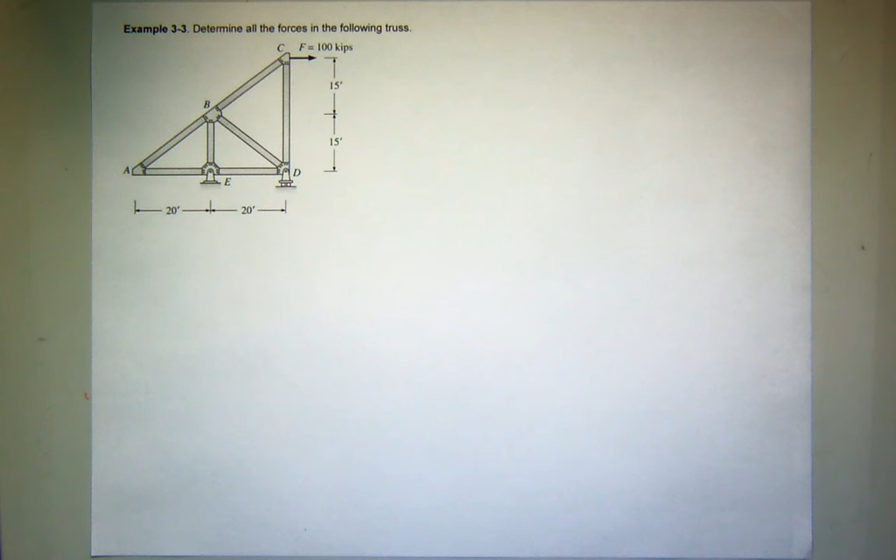All right, so let's look at this problem. We've talked about it a little bit already, but the first thing in terms of strategy, we probably are going to want to find the reactions at D and E to give us some things to work with. And also we're going to look for zero force members. So doing that first.

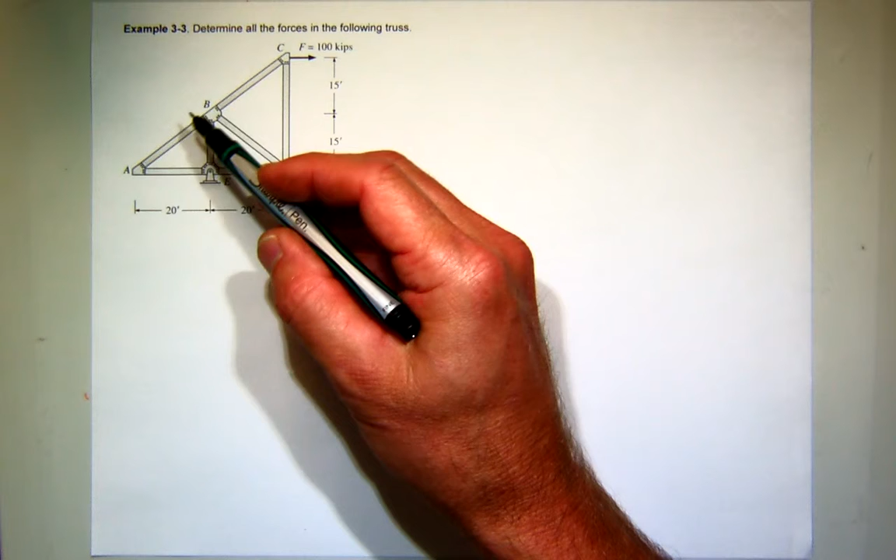The case 1 condition we talked about for zero force members, I see one here at joint A. Since we have 2 members connected and no external load, that means that this element and this element are 0. There are no other case 1s.

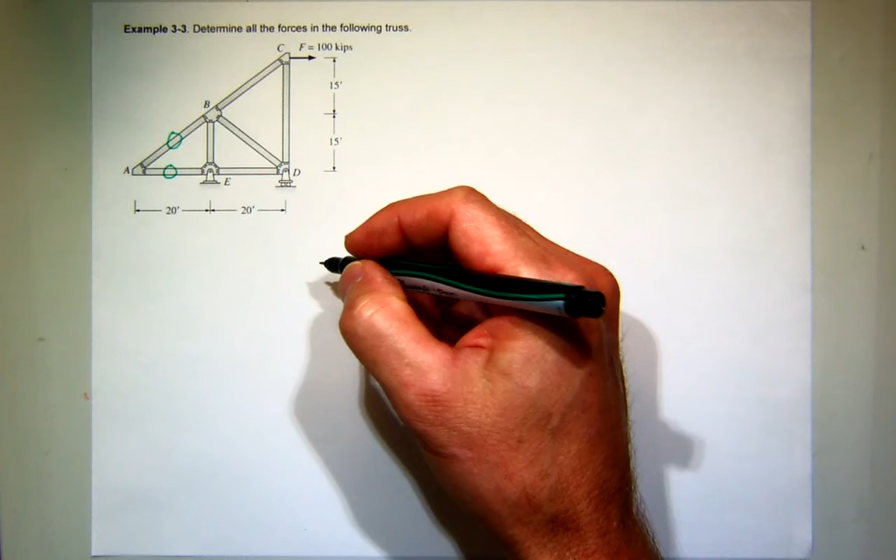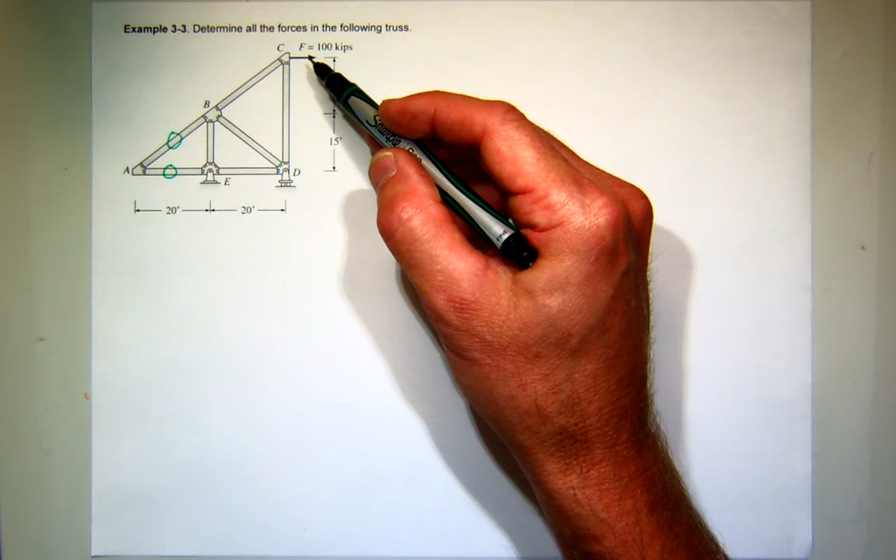It looks like you might create a case 1 here, now that this one's gone, but there's an external load at E, and similarly there's an external load at C. And then there's no case 2s, no 3 members connected, 2 collinear. So we got 2 pretty quickly. That's nice. Let's go ahead and finish the problem.

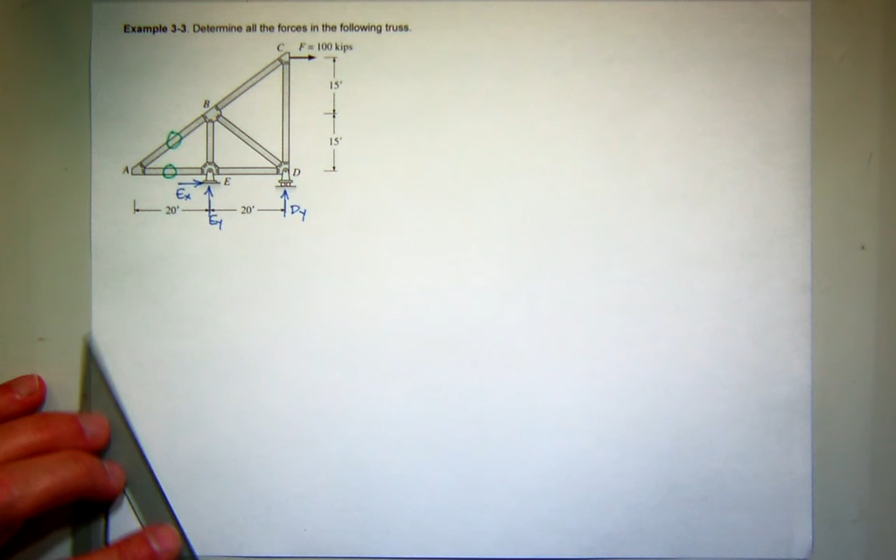I'll have EY and EX at my pin, and DY at the roller. So let's find those reactions.

I'll start by summing moments at the pin, E, equals 0. So what kind of moment does D create about E? Positive. So I've got DY, and what's its moment arm? 20 feet. And then the load up here, which happens to be the only load on this problem, 100 kips, creates what kind of moment about E? Negative. So I have 100 kips, and its moment arm is 30 feet.

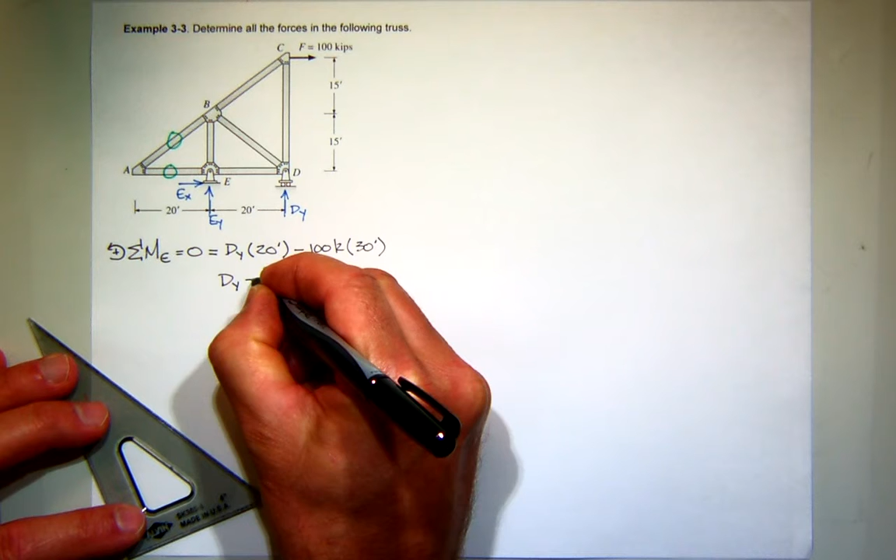So it looks like DY is something weird. 3,000 divided by 20, which is 300 divided by 2. 300 divided by 2? 150. And that'll be kips. And it's positive.

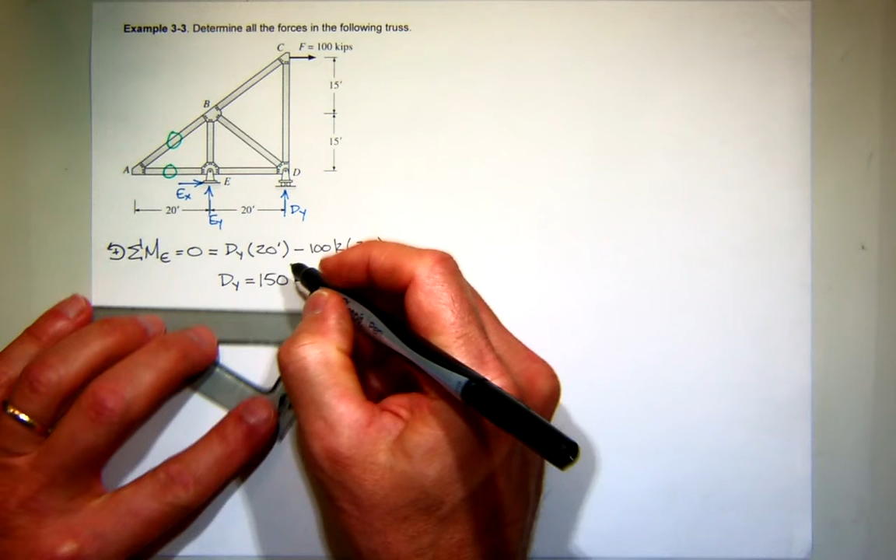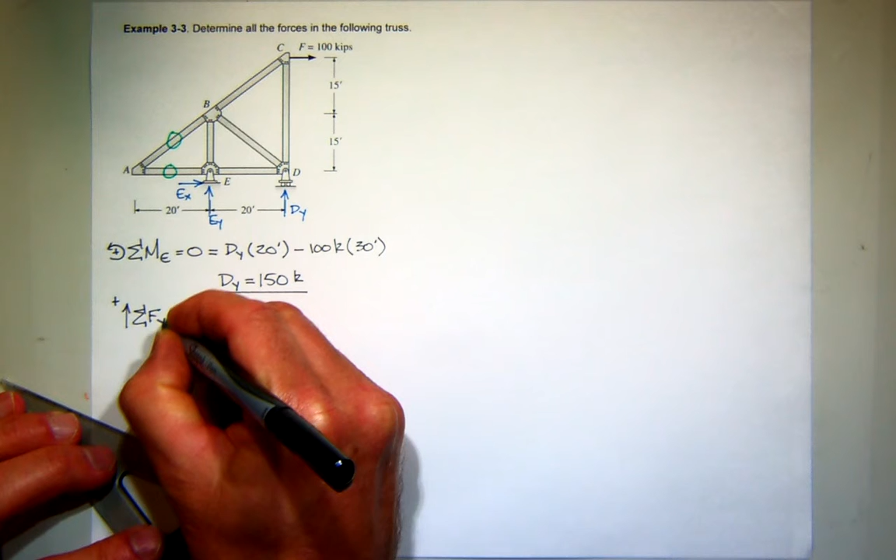So now we can sum forces in the y direction. So I've got EY up, DY up, nothing else. So that means that EY should be equal to negative DY, which is negative 150.

That kind of makes sense too. If you sit here at D, kind of think about it, if this force is trying to rotate it clockwise, well then this force better balance it counterclockwise, which in that case would be negative.

And then finally, we'll sum forces in the x direction. As you can see, there's the reaction EX to the right, and then our applied force of 100 kips also to the right. So it looks like EX is opposite, or negative 100, so it's actually pointing to the left. So we have our reactions.

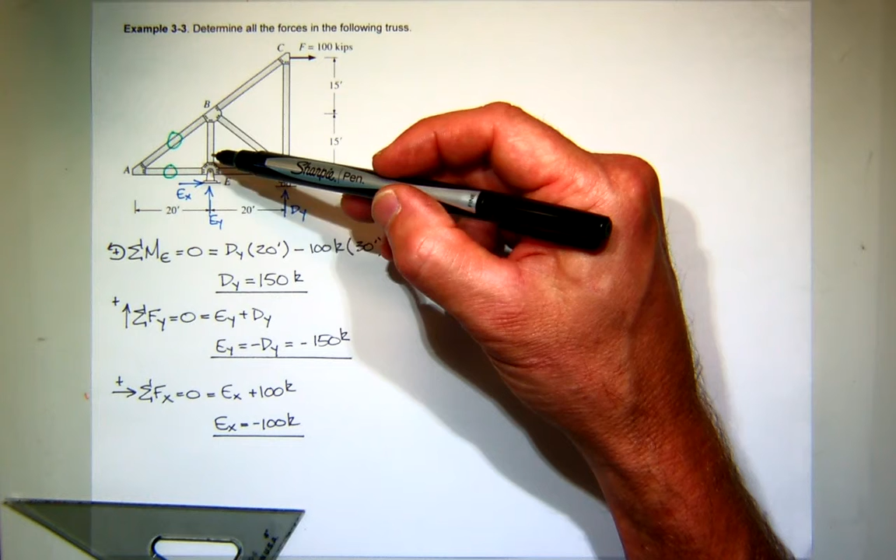So of the remaining joints that we have, B, C, D, and E, where's a good place to start? E would be a good place, just 2 unknowns. And what's good here is that DE is just horizontal, and BE is just vertical. That's a good one. Where else should we go? Probably C would be easy - again, only one has an X component, we should be able to get that pretty good. And then we'll just have to decide which way we want to go with the other 2. But yeah, let's start with joint E, that seems to be the easiest one to do.

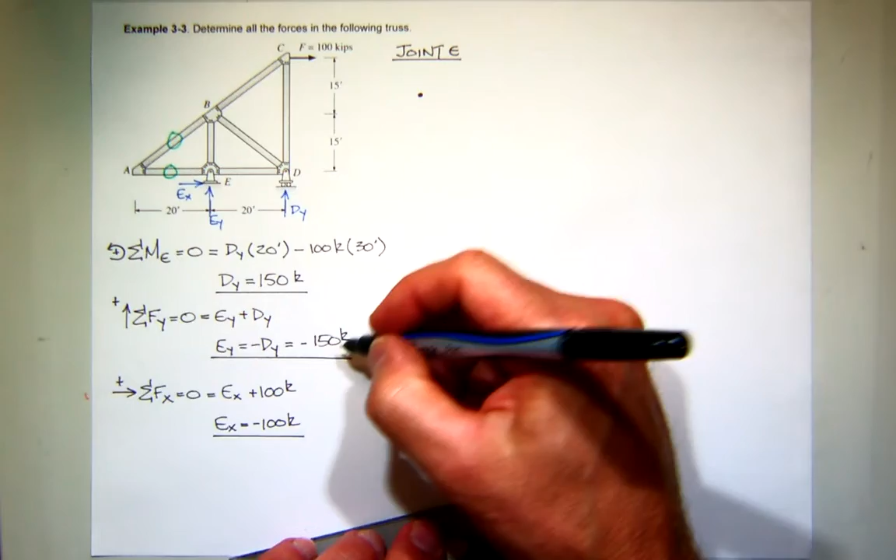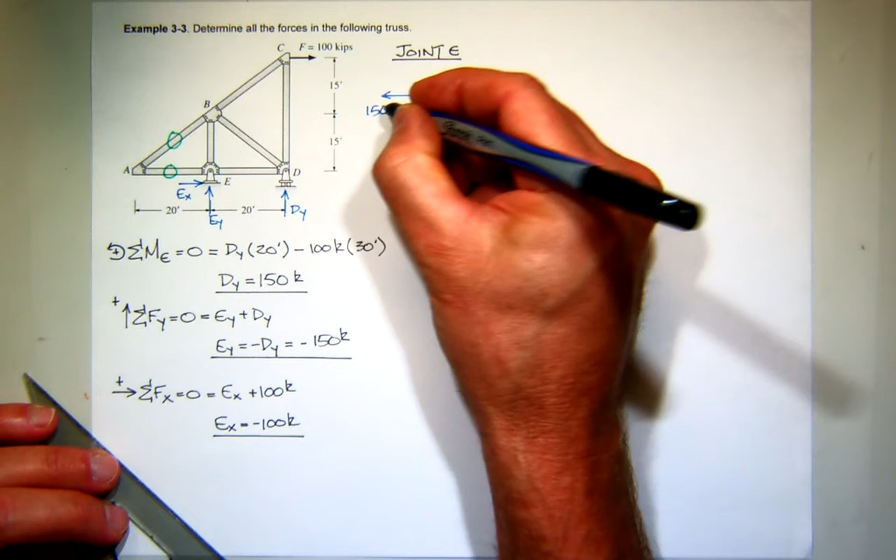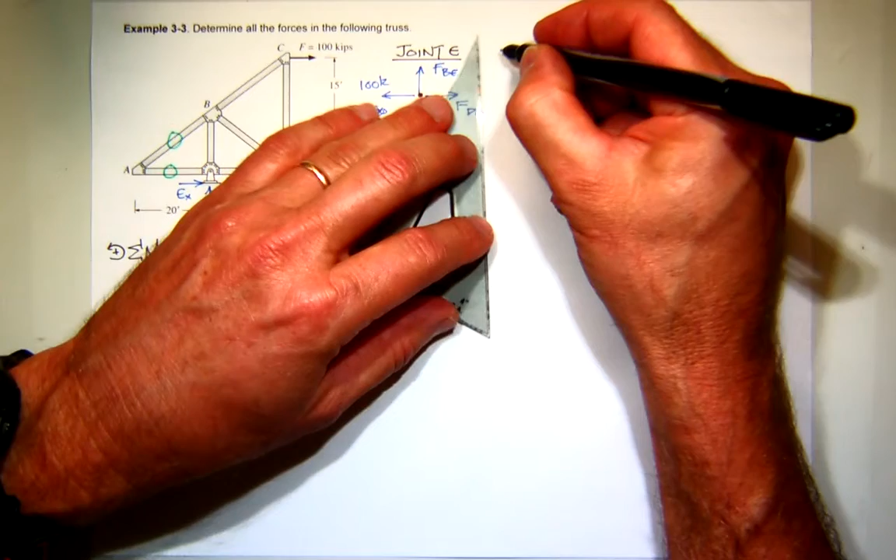So we'll start with joint E. Let's see what forces are on it. So EY we found was down, equal to 150 kips, and EX was to the left, also 100 kips. And then our tension forces are unknown DE, horizontal, and unknown BE, vertical. It's going to take us longer to write it down than it'll be to solve these, but let's do it anyway. No particular order here.

I'll just sum forces in the Y direction first. So I have the force in BE acting up, and then minus 150 acting down. So it looks like the force in BE is 150 kips.

Kips. Yeah, that's my K. I have a new K. It looks like an L and a B, but it's really a K. Oh, I did it here too, didn't I? Well, at least I was following my free body diagram, which was incorrect, but still. Sorry about that.

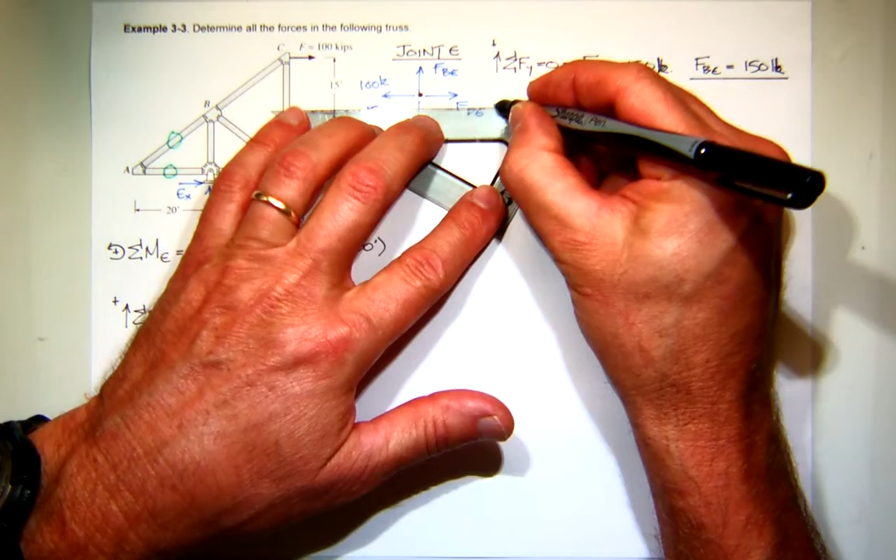So BE is in tension. Now we can sum forces in the X direction. Let's see if I can get my units right this time. I've got the force in DE to the right, and then to the left 100 kips. So the force in DE is 100 kips.

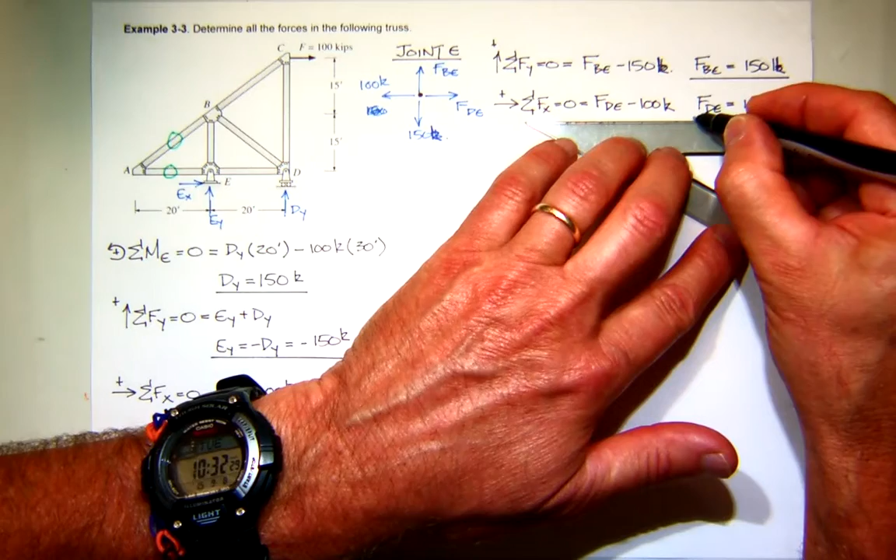So both those forces are tension. I'll go ahead and put a little tick mark through those. I got those two, so I just have 3 left. Now technically I could go to B, C, or D. They all qualify now, because even at B there's only 2 unknowns.

Now that's not a good place to go, because your unknowns BC and BD both have X and Y components. That's 2 equations and 2 unknowns solved simultaneously. Probably not a good spot. At C, only one unknown has an X component. That would work, and also over here at D would work.

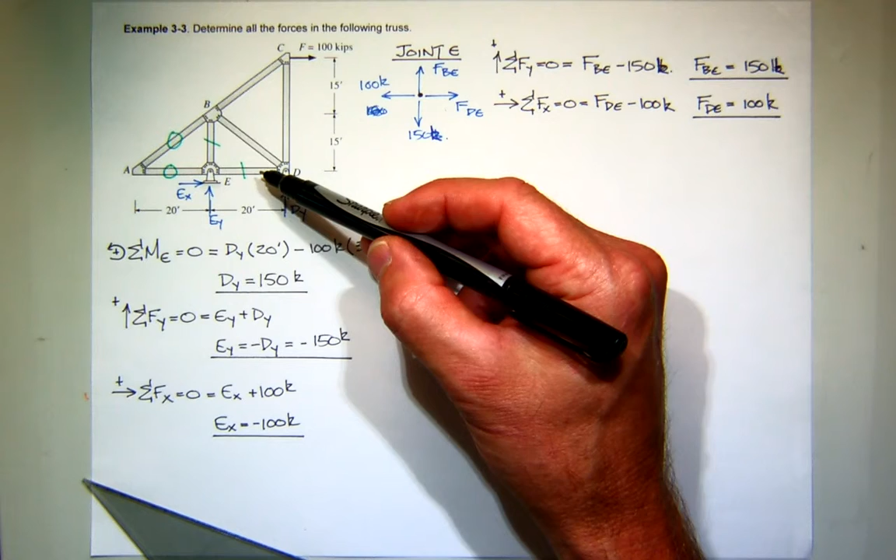Now I'm going to choose C because I can solve these forces at C without including any of the previous calculations, so I get an independent check on that. If I go to D, I'm going to have to include both dy, which I computed, and the force in DE, which I computed. So I think C is a better place to go.

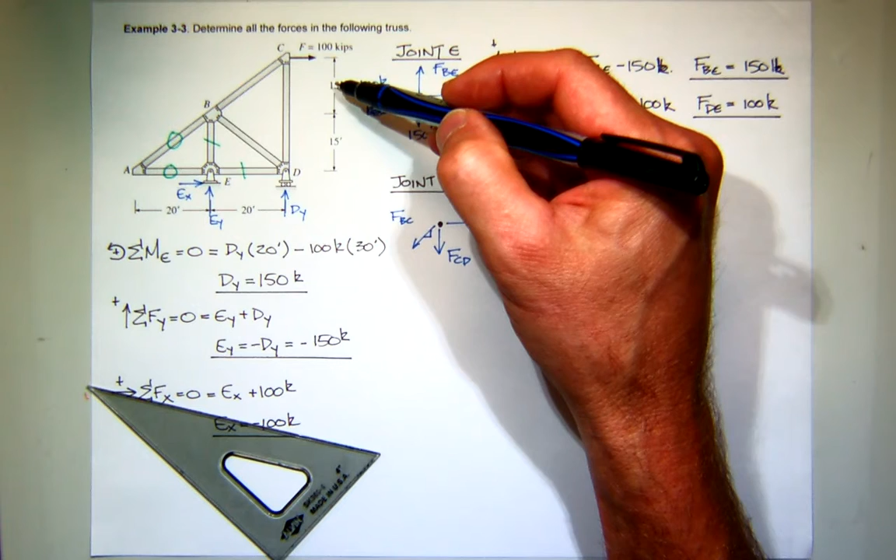So at C I have my 100 kip force, and I'm going to assume tension in CD and tension in BC. I'm also going to look at the orientation of this. It looks like for BC I drop 15 feet and go over 20. If you divide those all by 5, you get a 3, 4, 5 triangle. So it'll be 3 vertical, 4 horizontal, and the hypotenuse would be 5. That's going to help me with my calculations.

Since BC is the only one with an X component, that's where I'll start. I'll assume right is positive. So when I sum forces in the X direction, I have minus 4/5 of BC, that's the horizontal component acting to the left, and then the 100 kip force acting to the right. So it looks like the force in BC is positive 125.

Is that right? 500 divided by 4? Yep. That kind of makes sense. With this setup, as you pull here at C, you'd expect the joint C to move to the right, so more than likely BC would elongate, get tension.

Now that I have that, I can sum forces in the Y direction, and should be able to find CD. So when I do that, I have now the vertical component of BC, that would be 3/5 of the force in BC, that's acting down - sorry, I lost my minus sign - and then minus the force in CD. So I should be able to find the force in CD.

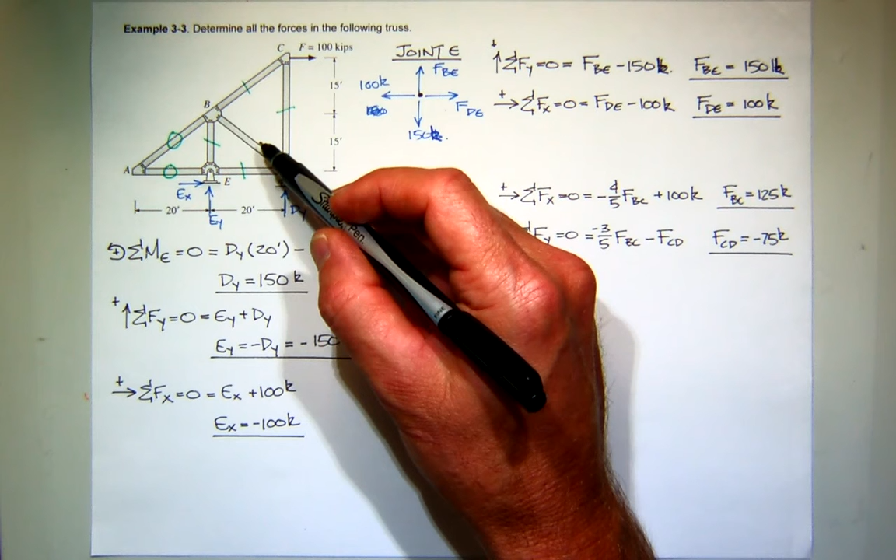I think still B is not going to be a good place to go with all those elements. Probably the best place to go would be D. And the other great thing about it is at D, I can probably find this in one equation, either summing forces X or Y. I don't know which would be easier. Probably summing forces in the X direction.

So let's finish this off by going to the joint at D. I'll draw my free body diagram - a lot of stuff to add here. So we got dy, which was up, 150 kips. I've got the force in CD, the force in DE, and then the one I'm looking for, the force in BD.

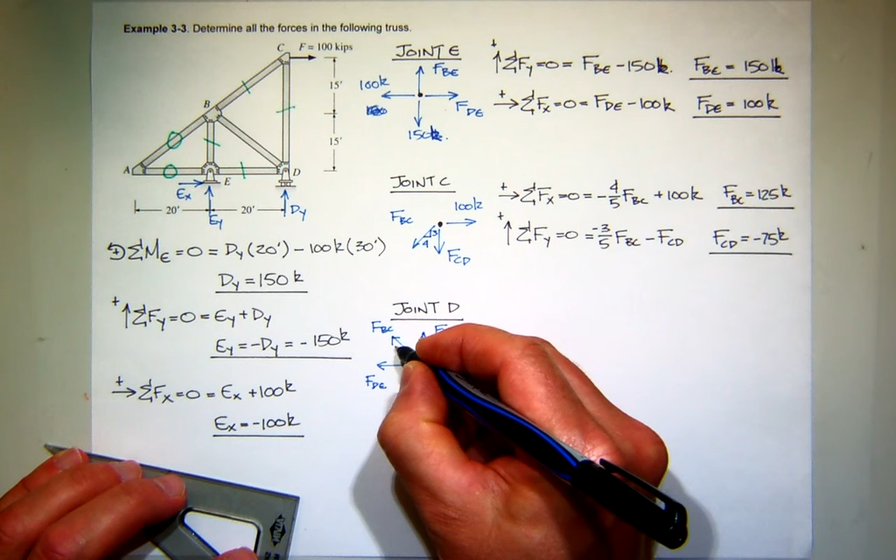It also has a similar orientation. It looks like 4 in the horizontal and 3 in the vertical, so another 3, 4, 5 triangle. By the way, the author loves those 3, 4, 5 triangles, so look for them.

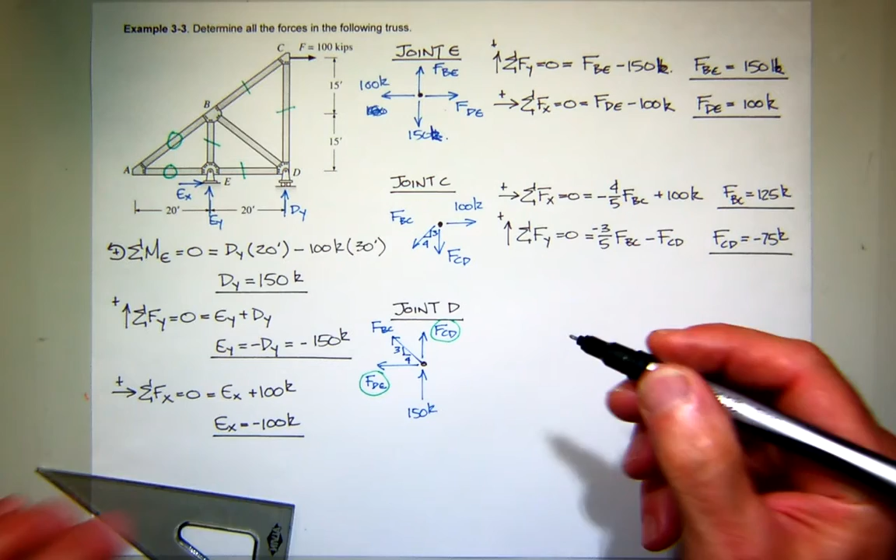Let's just do a little bookkeeping here. I do have DE and I do have CD, so whichever one you want - all of those were computed. So if I sum forces in the X direction, I only use one computed value instead of 2. It shouldn't matter, but I'm going to do it - plus one less force to account for. So I'm going to sum forces in the X direction.

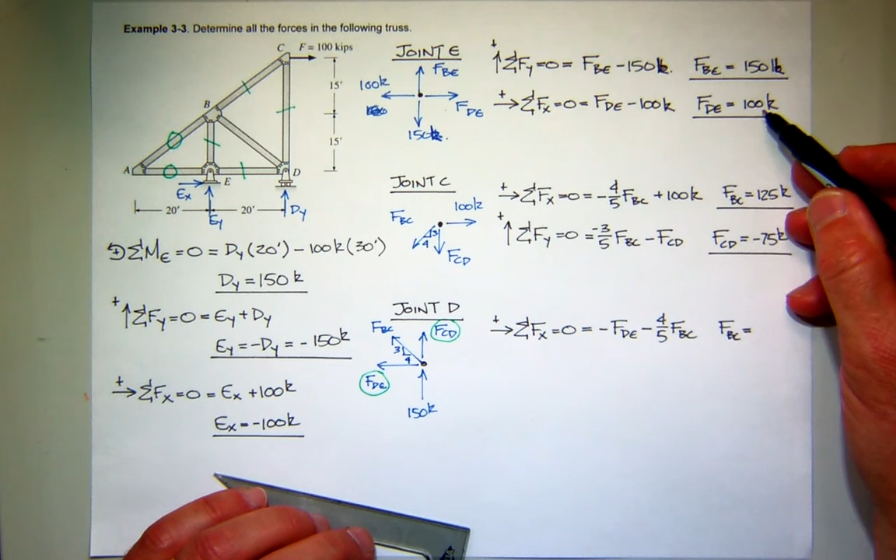When I do that, I have minus the force in DE and minus the horizontal force, which is 4/5 of my last unknown BC. So I should find the force in BC to be... what did I get for DE? 100? It's 125 again, except I think it's minus. You guys get that? Yep. And that's kips.

So I think that's it. Now remember, in my process, I always assume positive forces, so when I get my signs, positive is tension, negative is compression. So any questions about that one? Okay.